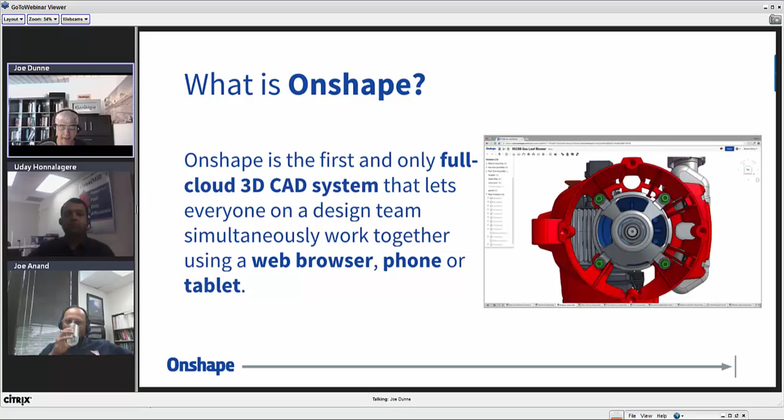It runs on every platform, right? This is why we had to start from scratch. We architected this product in a very different way than any product on the market. And one of the clear indications of that is the fact that you can run it on any hardware platform that you have, and it's really refreshing to be able to do that. And it's very powerful as well. The core of our product is similar to any MCAD, mechanical CAD system. It's parts, assemblies, and drawings, right?

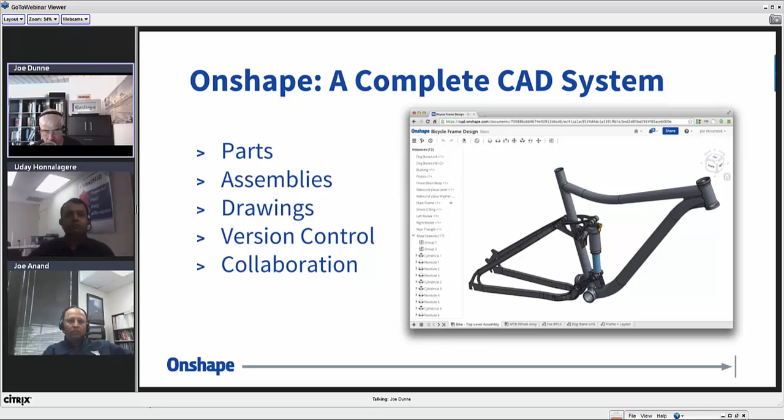It's the same thing that you use in SolidWorks or ProEngineer or CATIA or Inventor or Solid Edge, or I could name at least a handful of professional CAD products, and that's what we're going after. Onshape is parts, assemblies, and drawings. It's a core product for professionals to use, and it also means we work in a very similar way to most of the professional CAD systems out there, because, to be honest, they're all more common than they are different, and that means they're parametric feature-based modelers.

We use some underlying technology such as Parasolid and D-Cubed. Those are some tools that we're using under the hood. That raises the caliber of our product and puts us in the realm of professionals. And the reason why I say it is probably every product that you have on your desk or that you drive or that you use somewhere is using that same technology. It's pretty much the standard out there of all production use in CAD.

Now, what I want to make clear is a lot of people will look at Onshape, and Onshape is a brand new product. We do a lot already. But there's also some things that probably are missing that you might look at. It's possible anyway. Some people have a complete solution, but I get a lot of questions of, will you do sheet metal, or will you be able to do surfacing, or will you be able to handle large assemblies? And actually, we do large assemblies pretty well now.

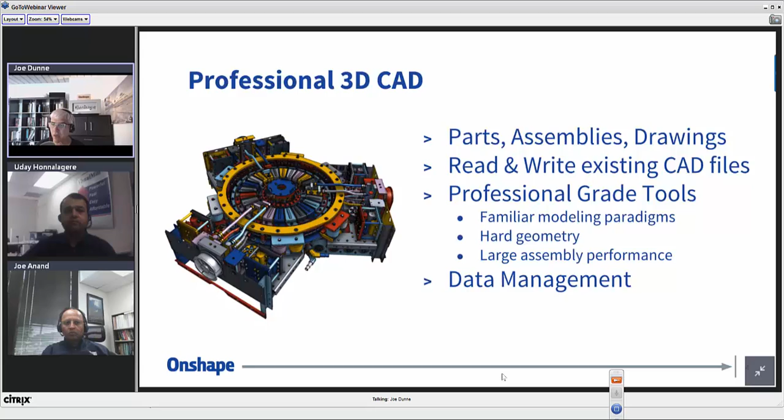But the point is that the answer is yes. If you look at Pro-E or Creo, or if you look at SolidWorks, or if you look at CATIA, if those products can do something today, the answer is that you will be able to do the same thing in Onshape. That's basically a roadmap, because we're going after high-end pro-grade capabilities. It's just a matter of when.

We're on an extremely aggressive path. Every 3 weeks, our product is updated. If you've been using Onshape, you'll notice that it's constantly getting new functionality. This is not a product where you wait a year and then go through some upgrade process. It's always up to date, and it almost literally always has new functionality that we're delivering to you in a very rapid way.

And I mentioned this already, but we do run on everything. So it's Windows, it's Mac. Between the three of us today, we're going to be on Windows and Macintosh, but I could have been on Chrome or even the tablets, everything.

It's kind of the whole circle. It's the old school coming back again for those of us that have been around a while, Joe. It's mainframe terminals in some ways, but terminals are super smart and cool now, because your tablets or your PCs or Macs are really good terminals. That's kind of the way I look at the cloud solutions, if you will.

Now, most of our users today are using Onshape, and if you're using it today, my guess is you're using it like you use SolidWorks, right? You create parts, you create assemblies, you might create some documentation and a drawing, but you're using it like a standard CAD system, and that's fine, and it works great that way.

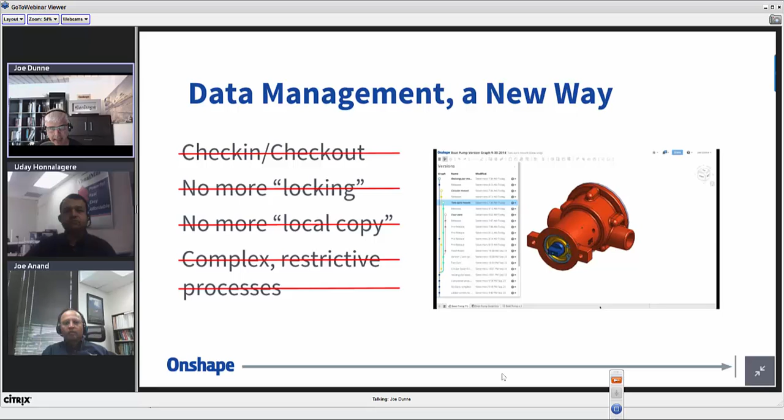So the database and the data management, the difference here, is that you're able to work with multiple people together. The three of us could all be in the same document at the same time, and we don't worry about accidentally overwriting each other's data, or who had the latest copy, or the process of checking out and checking in. All that stuff is just unnecessary. But my point is, that's where you really should look for a very significant difference in Onshape: being able to work with other people.

And if it's not clear about the business model, this was another reason why we really started from scratch. I doubt any of the existing CAD companies selling very expensive products can really do this. We have a free version and a professional version, and there is no difference in CAD functionality when it comes to parts, assemblies and drawings, surfacing, large assembly design. All the capability that we ship for Onshape is available to all users, and you can use the entire product for free. What we differentiate between free and professional is privacy.

And the idea is that if you use Onshape in a public manner, kind of think of it like Facebook or YouTube or something, you can build your models and work with Onshape, but other people could see what you're doing potentially. You don't have any limitations at all. But if you have intellectual property that you do want to protect and save, then you would be a professional user.

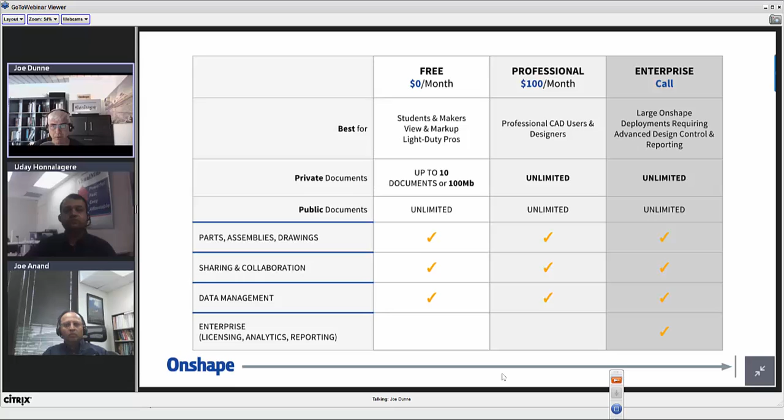And that's the way we've decided to attack this, because it allows the education market, makers, and hobbyists to have a tool they can use. Privacy is not a concern for them, and it's a great access point for them. But professionals probably don't want their intellectual property to be shared. So I really do love this business model, because it's just super easy to understand and to get access to. So that was Onshape.

Well, I want to turn it over. I think, Joe, you're going to do this part of it? Yeah. All right. I'm done. Okay, so yeah, thanks for the introduction there.

We're MecSoft. We actually work very well with the Onshape product. We are very impressed with what Onshape has done, and it's really a revolutionary product from our perspective. That's why we want to be their partners, and we work very closely with them. Uday will later show you how our products work with theirs. But for those of you not familiar with MecSoft, let me give you a very brief introduction before we jump into the actual demo.

What is MecSoft? We are a company that produces Windows desktop CAM software products for manufacturing parts in a wide variety of industries. We've been in business for quite a while. Our tagline is, "We are your CAM partner." What we mean by that is CAM is a little bit different from CAD, where you're actually interfacing with a machine tool. Typically there are a lot of issues with the handshake between the software system and your hardware.

So that's what we mean by being your CAM partner. We don't just sell you a product and go away. We actually stand behind our products, and we are there to support whatever post-processing or hardware issues you might have in interfacing our software with your CNC machine. So if you can go to the next slide, please.

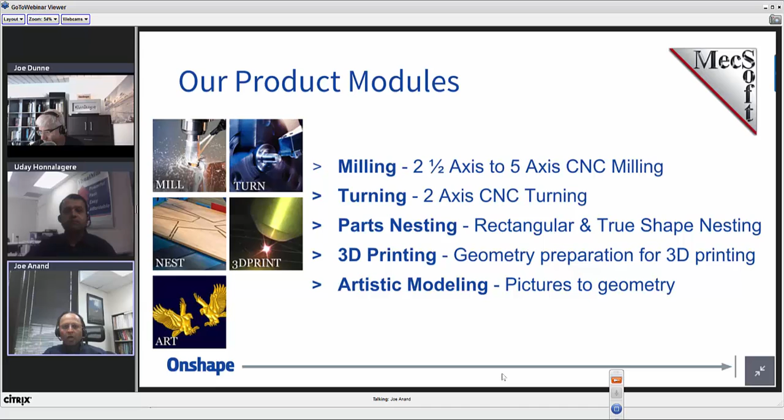And then we also have the 3D printing product I just mentioned, geometry preparation for 3D printing, fixing up bad meshes, holes in meshes, creating supports, and then taking them out to the 3D printer. And we also have an artistic modeling product. This is typically used by woodworkers, and we're doing relief modeling and things like that. So you can take bitmap pictures, BMP, JPEG, and PNG files, and convert them to actual 3D geometry that you can use in our machining product. So that's a little bit about our product modules.

As far as the industries that we target and we are very strong in, this is a list of industries. You can go to our website actually to see a lot of the case studies that we have done with various different customers in these industries. This is really not in the order of importance, it's just something I've thrown together here. Production machining, which basically means that you're machining a lot of maybe a single part. So that means you're optimizing the tool paths. So time is of essence. So you're creating very efficient tool paths, and typically the parts are prismatic parts.

Woodworking is a strong industry for us. Furniture making, both very functional as well as artistic furniture. Mold and die making. We don't play that much in the die industry, that is, if we're looking at the automotive dies. But in the mold industry, the plastic injection mold, we have a strong presence as well. Aerospace, space, and automotive. These are for, again, the smaller parts for aerospace and automotive. Because of our 5-axis offering, we can do aerospace type of parts as well. Thin rib parts and twisted parts and things like that.

And interestingly enough, we also are very strong in music. I mean, this is for musical instrument makers, things like guitars, violins, and ukuleles, name it, and we can actually machine these parts. And a lot of the music instrument makers are going to CNC these days. So, jewelry and artistic machining. Prototyping is big. A lot of prototyping is now being done in 3D printing, but there's a lot of materials that you still need CNC. For instance, if you want to do stone machining or rock or zirconium machining for dental applications, materials you can't really 3D print, that's where the CNC part comes in.

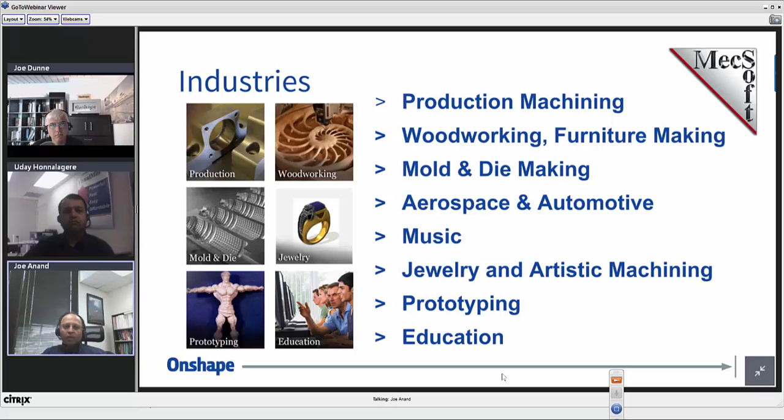All right, Joe, next slide, please. Okay, a little bit about our pricing. As I mentioned, in our milling product, we go from 2-axis all the way up to 5-axis milling. Not everybody needs 5-axis. So what we have done is we configured our product to tailor it to different needs.

And this is really, as I mentioned, for tire kickers who don't know CAM, want to get into CAM, but they don't want to spend any money at that point, but want to learn a little bit of CAM. And then students as well. A lot of students use this product.

And then we have the standard configuration, which retails for $1,500. We're doing a sale right now, actually a month-long sale, which is selling for $999 US dollars. By the way, these prices are only for North America. We do have resellers in other parts of the world, and the pricing might be different. In Europe, for instance, all our resellers sell in euros, because of customs and local taxes, prices are different, so you need to check with the local resellers to get the correct pricing. So the standard product includes full 2.5-axis and 3-axis support.

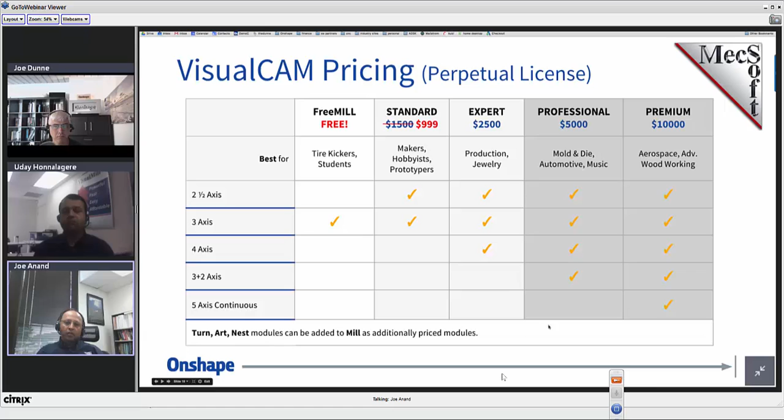And we also have turn, art, nest. These are modules that can be added on top of the mill products that I just talked about. And you can get all the pricing information from our e-store. We just launched an e-store. If you go to our website and click on the eStore button or Buy Now button, you'll be able to see all the pricing. We're pretty transparent about our pricing, so it's all there. So go ahead and take a look.

All right, Joe. And now let's jump on to the demo here. Yeah. Thanks, Joe.

What we thought we'd do is start off with a little bit of Onshape. And Uday and I are both working together. The point I want to make here is not to give you an overview of Onshape. Like I said, there's other places that we can cover this in detail. But for those of you that are using it, there are certainly a couple things I think you should try if you haven't.

And the first is just the fact that this is a great scenario. Let's just say for the sake of argument that this is the part that I as the engineer am working on. I'm building a gearbox. And so I've done the design as the engineer, and now it's time for manufacturing. A very common scenario is where I probably have someone else that's the expert in manufacturing. In this case, it's going to be Uday, but it could be someone else. You have several options, right?

If you're using a typical CAD system, your option is hoping maybe they have the ability to read your CAD system, and then you could zip it up and send them your SLDPRT or whatever it happens to be. Or you can also zip up a STEP file or an IGES file and email it to that person. Problem with that is it's called throwing it over the wall. Exactly.

It's what we all do, right? Or we used to do. And this was probably one of the number one reasons we thought that life could be better. There's a lot better way than doing that.

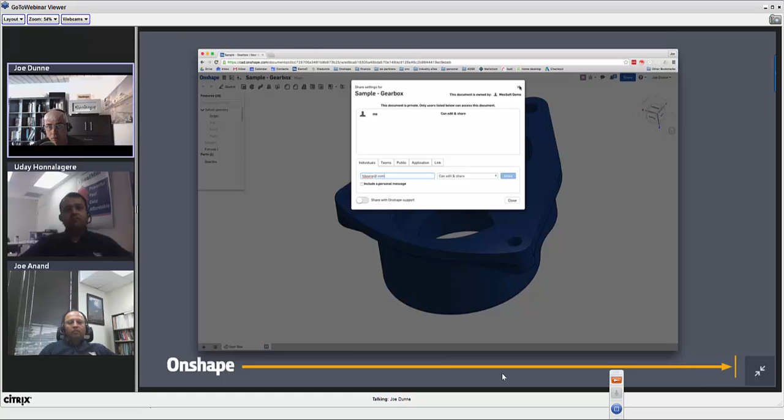And I never worry about, do they have Onshape? Do they have the right computer? Do they have the right version? All that's just taken care of, none of those hassles.

The other thing that's really interesting is that you'll notice there's a big M up there. So Uday, I've shared this model with him, and he's in the model as well. This is the type of thing we can do together because we don't have to create a copy of it. He's working and seeing the exact same thing I am. We're both in one, there's one source of truth. So the entire world can work on this one part.

A couple things we could do: if he makes a change, I see it. If I make a change, he sees it. We don't worry about it. There's a whole versioning tool where we can start putting in versions and create branches, and there's a ton of capability to give us some control over how we work together.

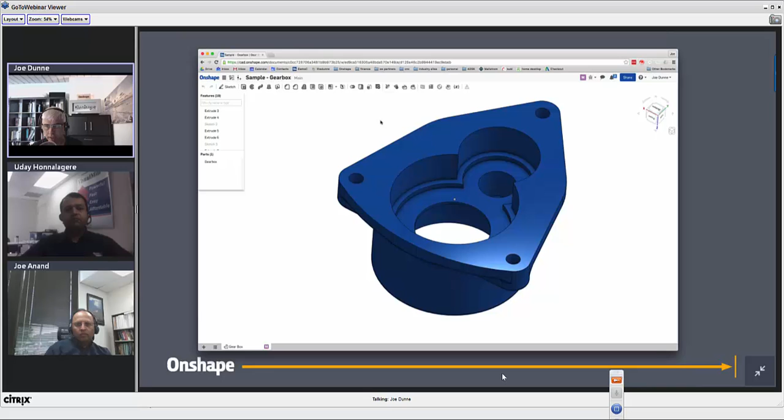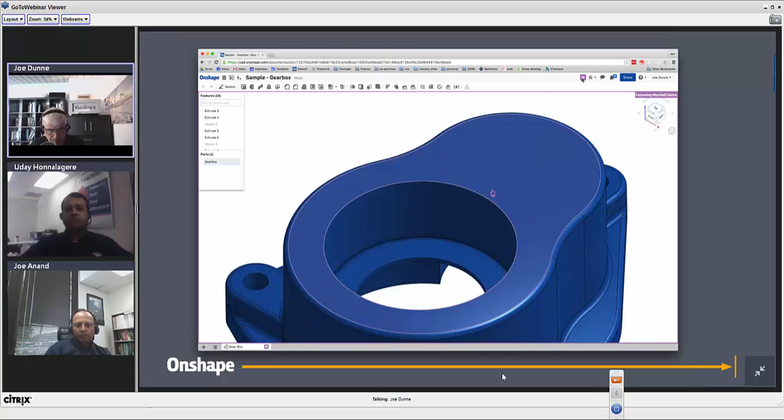However, one of the interesting things—I'm going to do one last thing and then turn it over to Uday—if I click on Uday, Uday, if you want to rotate around, give me some pick up face, zoom in and out, this is just another built-in default functionality of Onshape. I'm not touching the screen now. This is us working together, just in our product, I shared with Uday. I've given him a certain level of access to the model, and we can work together to collaborate on this design.

So it really does simplify the idea of working as a group or working with more than one person. I don't know anyone that does everything all by themselves. There's always something that you need to do to work with someone else in some way. So I think that is what I wanted to show.

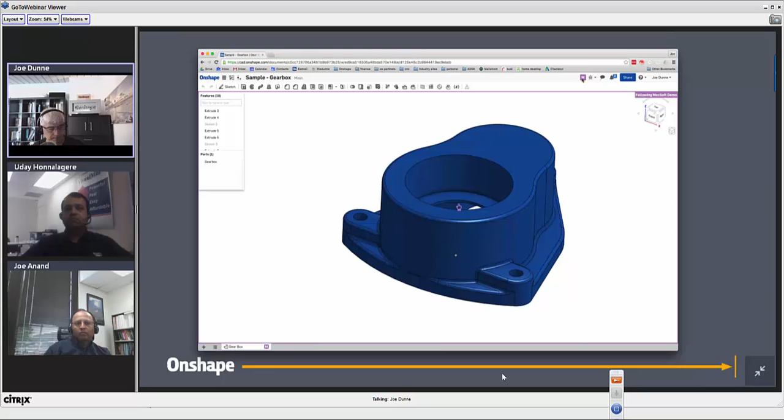Folks, as you can see, Joe and I are both working on the same part in Onshape here, and I have the part and Joe has shared it with me. So now let's take a look at how we can take this model that you've designed in Onshape into Visual CAD-CAM. I go ahead and start up the Visual CAD-CAM application.

Right under the Home tab, I'm going to go up to the Visual Import for Onshape, and select Import from Onshape. When you click on Import from Onshape, this automatically displays your Onshape Document Manager. Obviously you've got to sign in for the first time to connect your documents through the document manager, and then you can look for all of your files in here. So I have several different files, and you can pick the part that you'd like to program. Just select the part and then click the load button.

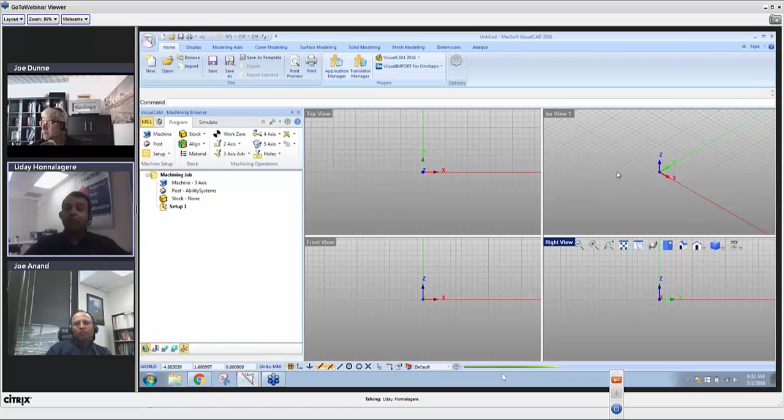This automatically transfers your file into the Visual CAD/CAM desktop application from Onshape, without having to go through any manual file transfer process—your part is already in here, and you can work within Visual CAD/CAM now to program your part. We already got the part translated in just a few seconds, as you can see. Now we are ready to program some toolpaths.

So you can go up to the Visual CAM menu and select the module you'd like to use for programming. In this particular case, this part is ideal for our milling process. I have the mill module selected, and you'll notice the milling interface appears on the left panel, automatically docked. You have the machining operations browser, which gives you access to your program and the simulate tab. And the machining objects browser, which typically appears right below, gives you access to defining your tools, machining regions, features for detecting hole features, and also knowledge bases.

Now the typical workflow in here is to work your way from left to right as you work through each of these groups under the program tab. So the first step, you want to determine if this part is going to be programmed on a 3, 4, or 5 axis CNC mill, and the type of process you're going to be applying for it.

So we'll go up to the machine setup under the program tab and select the type of machining process. For this particular application, I'm going to pick 3 axis. 4 and 5 axis options are also available. So if you have a 5 axis machine and you'd like to machine parts from different orientations, you can do that. In the next step, you would want to select the post processor.

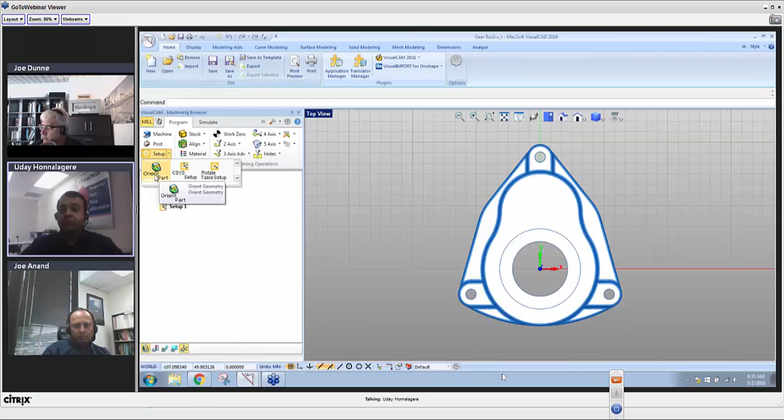And then you're ready to define your stock geometry before you start creating some toolpaths. You can go up to stock, and there's a wide range of different options for defining stock. I'm going to go with the box stock in here, and this automatically determines the minimum stock extents required based on the geometry you imported.

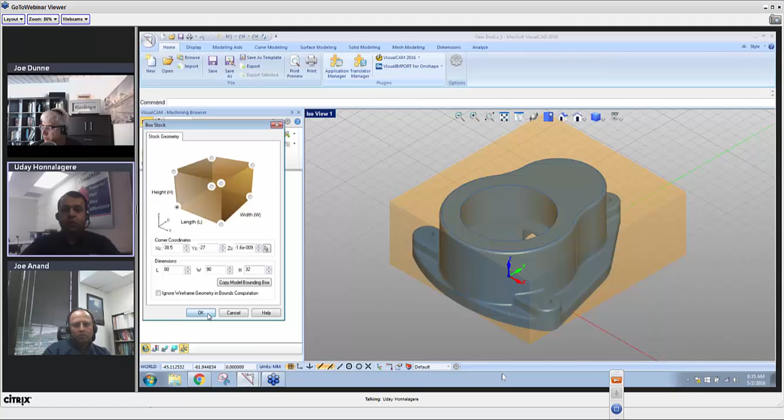So I'm going to round off these numbers. I'll use 80 millimeters by 90 millimeters for the length and the width, and the height I'm going to change this to 32 millimeters. Now once the stock is defined, you can preview the stock right on top of your model.

The next step is to go ahead and align it, and we'll have the stock aligned, and we'll flush it to the bottom in Z, so the bottom of the part is nice and flat. So we're going to flush it to the bottom, and we'll have it centered in X and Y, so you don't leave a factory edge and you clear material from all 4 sides.

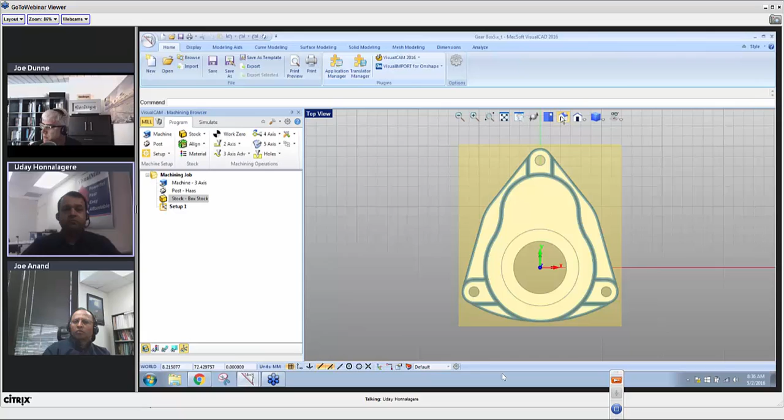Now the next step is to establish your origin. So you can go to set world coordinates. You can set your origin to the stock box, since in this case the stock is larger than the part. And I'm going to put the 0 face to the highest Z, which is the top face of the stock blank. And for the 0 position, I'm going to pick southwest.

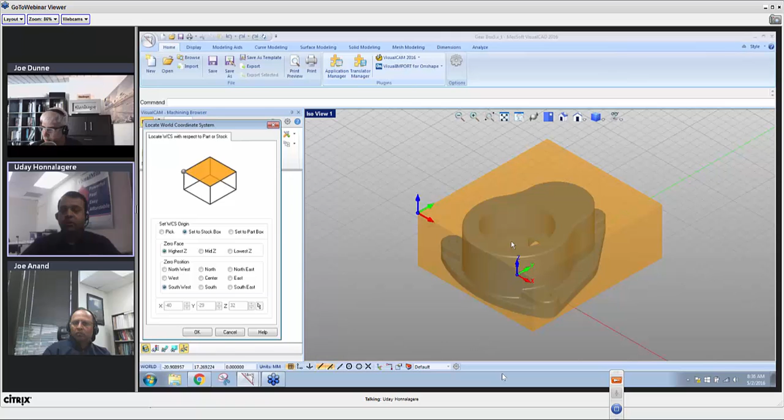Now if you'd like to pick the center of a hole, or you can snap to any point, you can use these controls in here to do that. Now as you notice here, the workflow we are working through is going from left to right as we work through each of these groups.

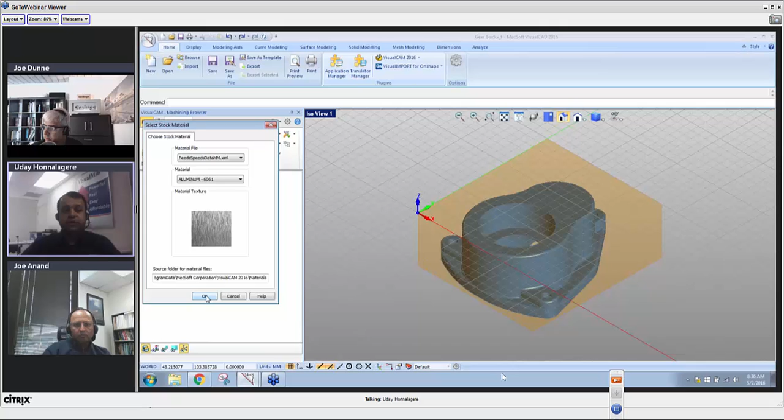The next step is to set your material type, depending on the material you're going to be using for milling this part. So I could pick aluminum 6061, or whatever material you prefer to use. And then you can also display the texture of the material in here. And when you go to your Simulate tab, you can see the texture of the material is being applied to it.

In the next step, you're now ready to program some toolpaths. As Joe pointed out earlier, Visual CAD/CAM offers you a wide range of toolpath methods.

Under 2 axes, we have several methods starting with roughing, facing, pocketing, high-speed pocketing, profiling, V-carve roughing, engraving, chamfering, hole pocketing, thread milling, and remachining.

The 3-axis offers you an even larger set of methods starting with roughing, re-roughing, clear flat machining, pre-finishing and finishing methods, remachining, and pencil tracing, curve-based machining methods.

And of course, we do have 4-axis methods for both indexed and continuous 4-axis and simultaneous 5-axis methods. You also have hole machining methods for 3-axis and 4-axis as well.

Now for this particular part, I would like to start with first roughing it out. So I'm going to go up to 3-axis and use roughing in levels, called horizontal roughing. Since this part has sculpted features on it, I'm going to use 3-axis roughing, and I'll skip the process of selecting any containment areas, so the system will automatically determine the areas that need to be roughed based on the stock and the part geometry.

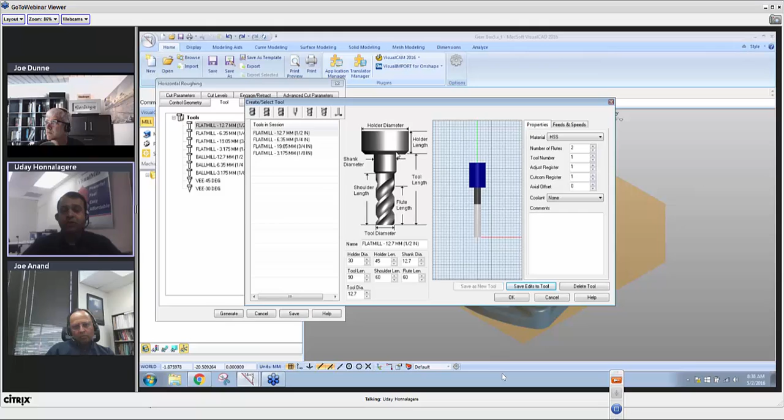We'll select a tool in here. If you'd like to make edits to your tool, just double click on it and you can establish the properties of your tool, specify the material and the feeds and speeds. There's also a built-in feeds and speeds calculator based on the stock and tool material type, and Visual CAM can give you recommendations. Once established, you go into the feeds and speeds tab and you'll notice they're automatically loaded from the tool.

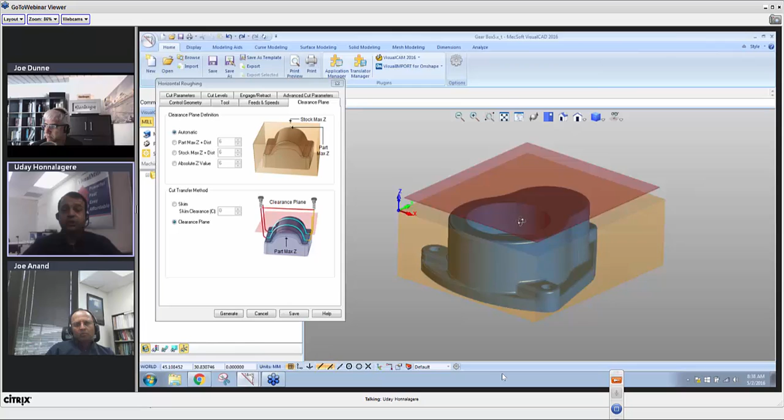The next step is to establish your clearance, your safety plane for transfer motions. When this tab is active, the clearance plane automatically displays on top of the part in your viewport. Then you can establish your cutting parameters: tolerances, stock to leave, cut pattern, cut direction, step overs, cut levels for how fine you'd like the cutter to step, and specify engage and retract.

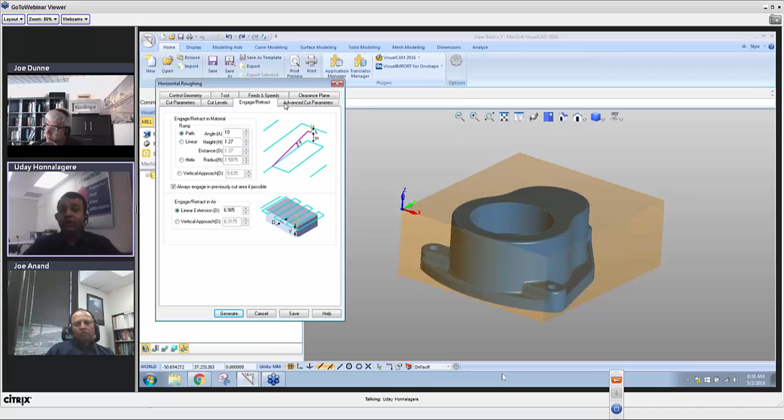Hit the generate button, and the system automatically determines your toolpath based on the part and stock geometry. It computes your roughing toolpath based on the tool selected and the parameters defined, and once computed, the toolpath automatically previews on top of the part in your viewport.

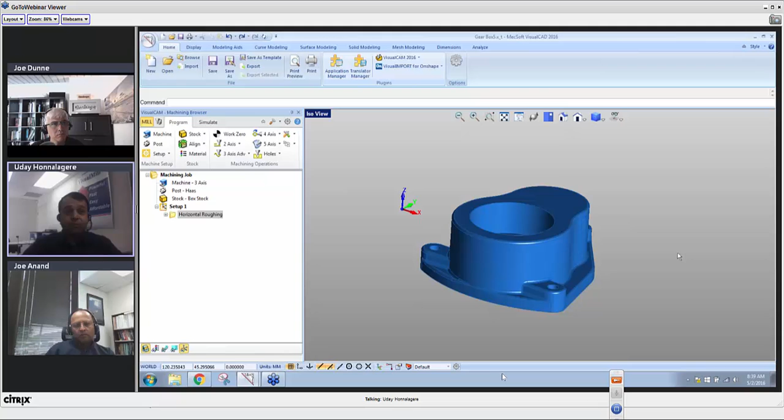What I'm running here is a multi-threading manager. If you have multiple operations, you can generate them simultaneously, each processed on a separate thread. The roughing operation has been generated and automatically appears under your operation tree under setup. You can click on toolpath visibility to preview the toolpath right there.

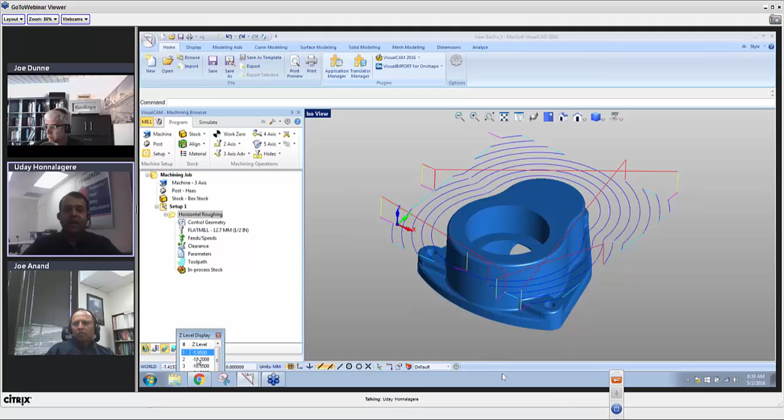You can see those nice arcs on your toolpaths, and you can view the toolpath as you go through each Z level as well. So those are your roughing in levels toolpath.

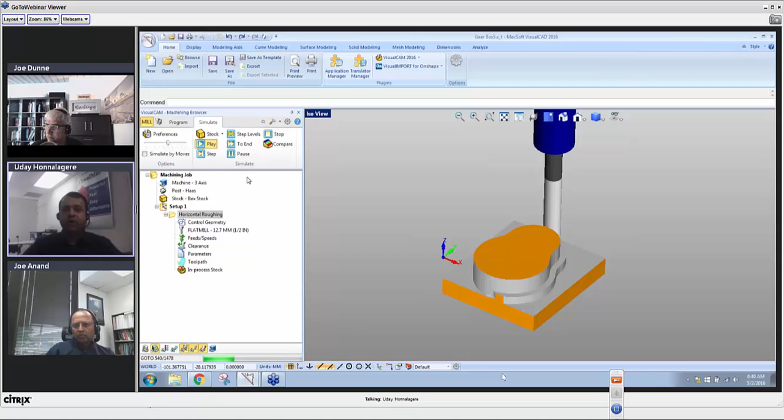Now let's go ahead and run a verification in here, so let's switch to the Simulate tab. You select the operation and hit the play button, and there's your verification right there - your cut material simulation. You can always pause it and then hit simulate to end to run through the simulation.

Once you have it simulated here, in the next step you may want to go back and finish some of those areas. I would like to clear the flat, so you can do a combination of 2 and 3 axis operations.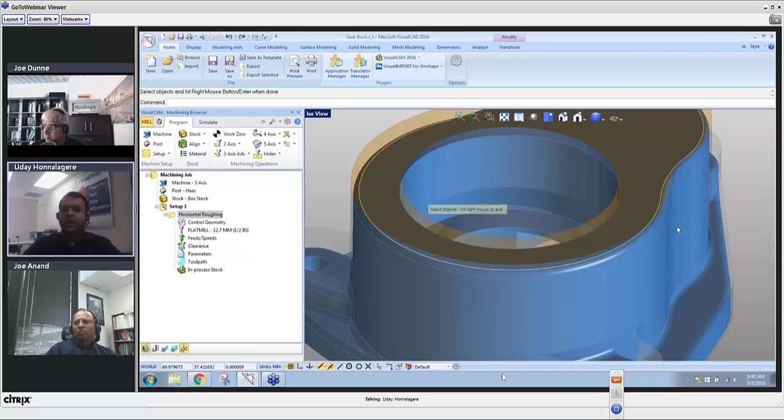Here I'm going to use a facing operation. Select the features - I can directly select the surface edges from the model, as you can notice here. I'm not creating any additional geometries, I'm taking the face edges that were built as part of your design in the Onshape model - those are the face edges. I'll still go with the same tool, the same set of feeds and speeds and parameters, set my parameters for roughing, and then click generate. There's my 2 1/2 axis facing toolpath to clean up the top face of the model.

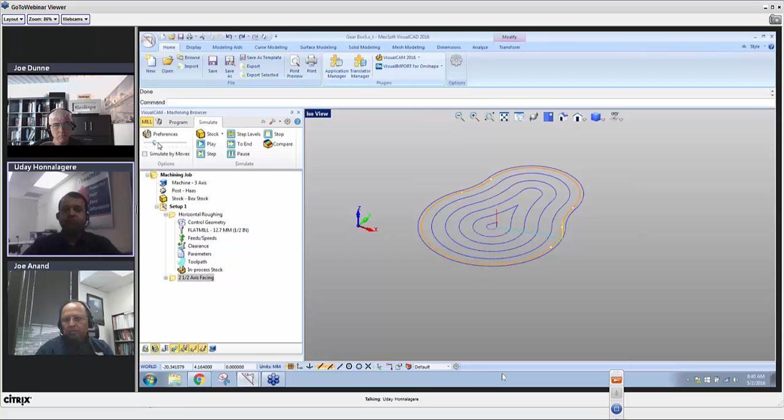And hit play to run the verification. So you can program these toolpaths in here.

Now I want to go back and finish up these holes. I'm going to program a hole profiling operation, 2-axis hole profiling. Select my machining features right here and grab a tool for it. We'll still go with the same tool, specify all the cutting parameters.

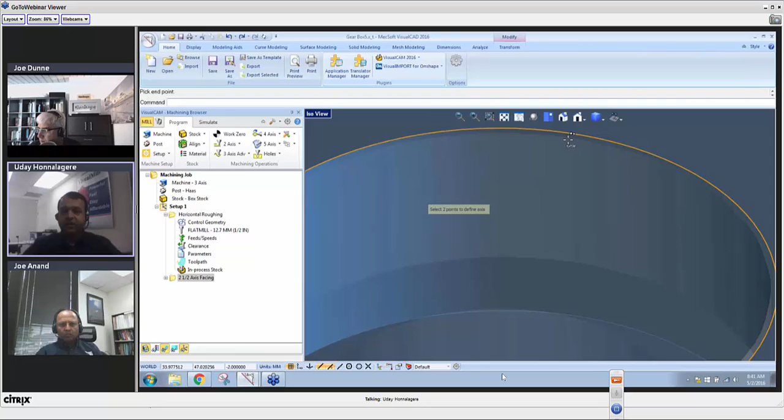I'm going to pick the depth of the 3D model here by snapping to the top edge, and I'll pick the edge near the floor of the part, and there's my total depth. I can specify all of the additional parameters in here. You can also choose your entry and exit and then pick generate.

And there's your hole profiling operation. Go to simulate to run your verification right there.

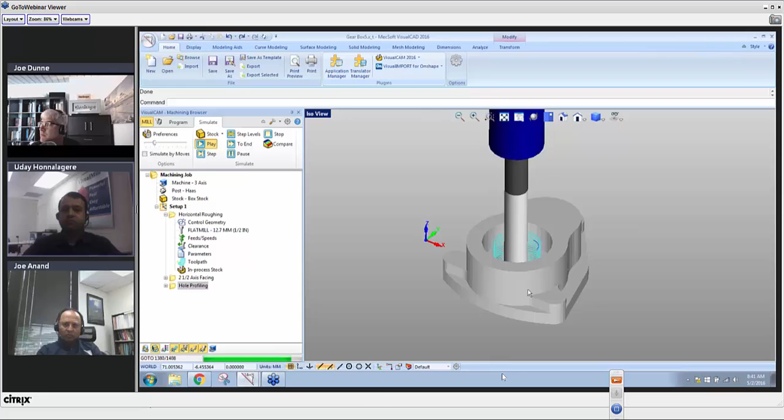Now I would like to go back and clean up the flats in these areas in here, so we can use one of the advanced 3-axis methods called clear flat tops machining, where you can basically select just to mill certain areas in the model. I'm going to use a containment in the Z. I can pick where I want to contain it, as you can see right there. So I only want to cut these flats out, specify all your parameters, and then pick generate.

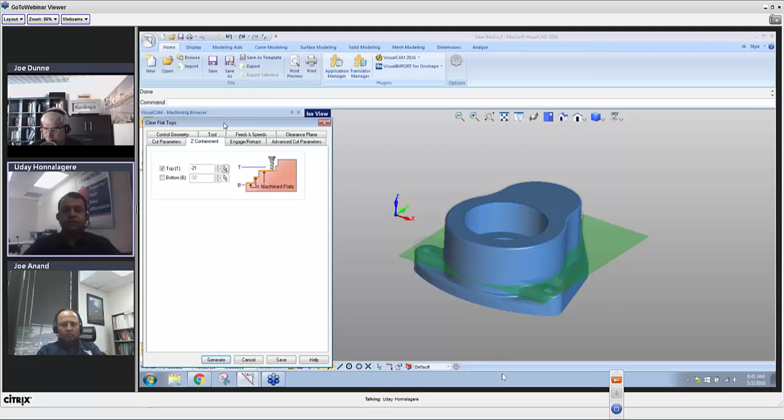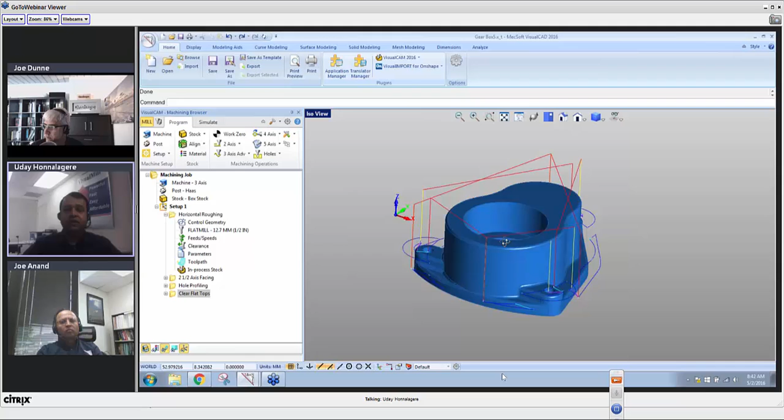In this process, it'll automatically go back and clean up these flats where you have the flats around the filleted edges in the model. So you can program using a combination of both 2 and 3-axis methods in here to efficiently program your part. So you get precise control on each of your toolpaths. There it is.

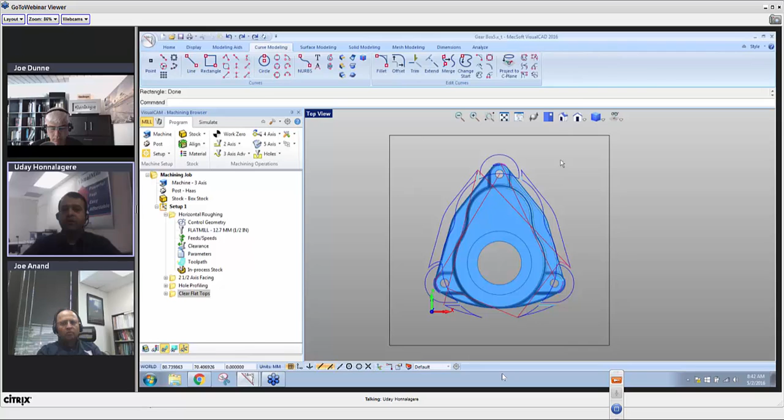Now I would like to go back and finish these exterior shapes and then also do a chamfer on it. Now, since I would like to restrict the toolpath to a specific area, I'm going to use a boundary in here, so you can use some of the drawing tools that are available to you in Visual CAD, and I'm just going to throw in a larger boundary in here. And now I'll go back and program a 3-axis finishing toolpath.

So I'm going to use finishing in levels, which is known as horizontal finishing, and I would like to contain it between these two boundaries in here. So you can use some of these drawing tools to quickly create these boundaries. You can specify a tool for it, specify your cutting parameters, you can control your cut levels, you can also do an optimized machining, and then pick generate.

So in this process, it's going to do a finishing in levels to finish all of the features on the exterior in here using a ball mill or radius tool. So you could be programming multiple operations at the same time. So while the horizontal finishing is being programmed, I could go back and add a chamfer operation in here to select my features for chamfering.

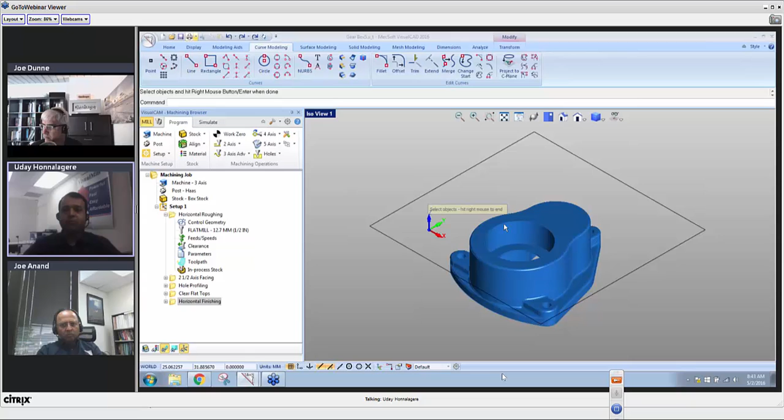So I'm going to pick this edge right over in here and pick the geometry for chamfering. I'm going to grab this edge and go grab a tool for it. We'll pick a 45-degree chamfer, specify the parameters for cutting, and I'm going to choose to determine the side to cut based off the 3D model. So it knows that the chamfer needs to go on the inside and not cut the outside. You can specify your parameters for entry and exit and then pick generate.

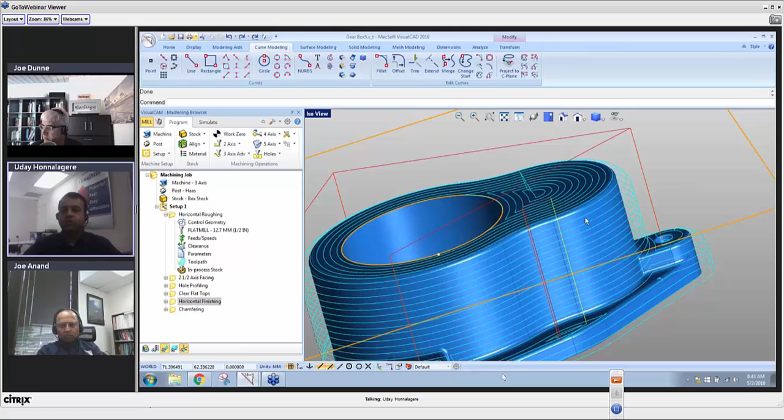And there's your chamfer toolpath. We just got done with the horizontal finishing also. Look at the nice toolpath right there. Finishing in levels with an optimized machining. And we got the chamfer in here on the inside. So let's go ahead and run a verification for those. And hit the simulate button, and there it is.

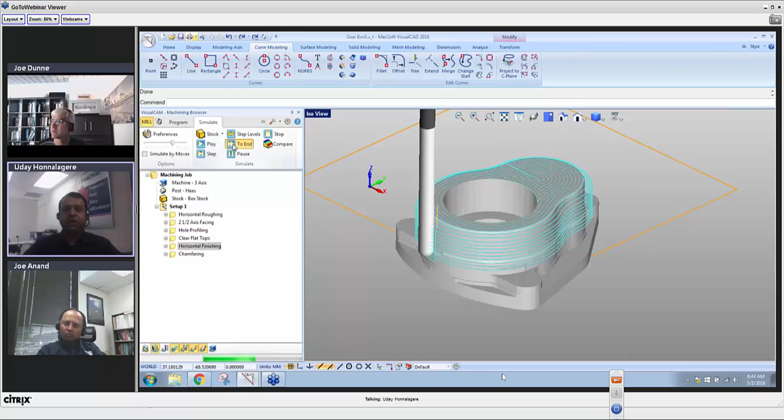It's finishing it up. If you'd like to speed up the simulation, you can use the controls right in here to have it go faster or slower. You can also pause it and then pick simulate to end to run through the simulation. And there's your chamfer. So you don't necessarily have to have the chamfer model on the part. If you just want to break the edge, you can create a chamfer toolpath.

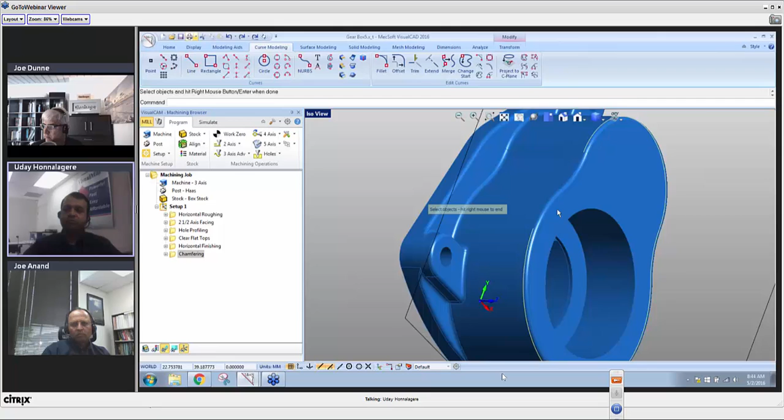Now finally, I would like to mill this fillet using a fillet mill tool. So I'm going to use a 2 1/2 axis profiling operation in here. And I'll go ahead and grab the same set of edges. I'm going to just grab the edge right here at the fillet, at the base edge of the fillet. And you can basically select multiple face edges.

Now once you have this selected in here, I'm going to go to my tool selector, and I have a fillet mill in here. The fillet radius is 1 millimeter, so I have a corner radius of 1 millimeter set for the fillet tool. I have the tool selected, specify the cutting parameters, and again I'm going to use determine using 3D model, so it automatically knows which side to profile the fillet, and then you can specify your entry and exit parameters and then pick generate. And there's your filleting toolpath right there.

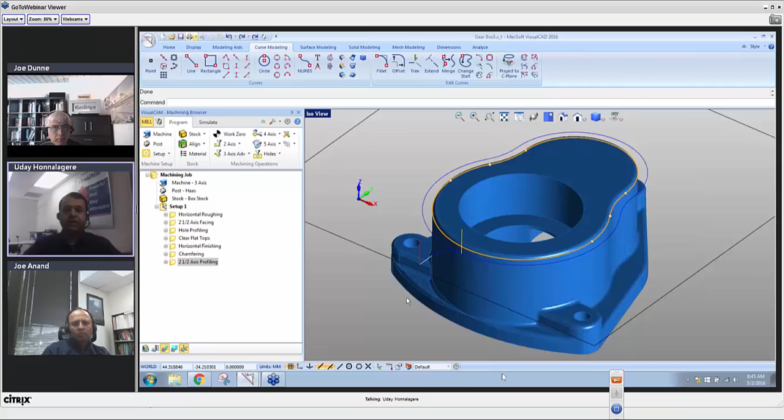If you'd like to make any changes or edits to the parameters, you can always go back and edit it and make changes in here to your entry and exit parameters, and then regenerate the toolpath. And there it is. So let's go ahead and run a verification. Hit the play button. There it is. Your part is now... Slow it down. Can you slow it down? I want to see the fillet. Sure, I can do that.

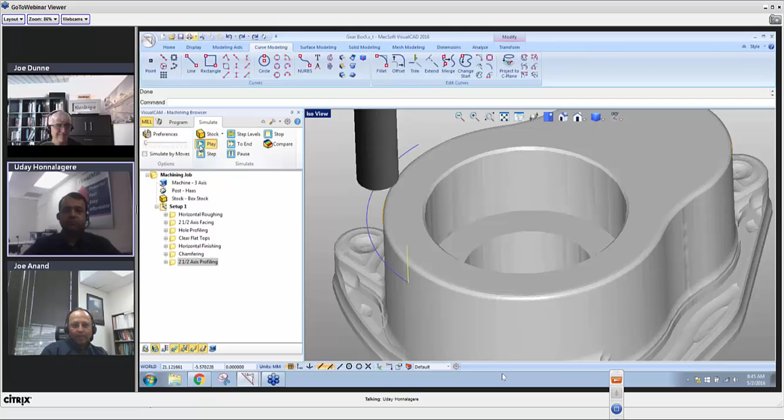There it is. Was it better, Joe? Yeah. Okay.

So once you got all your toolpaths programmed in here, you could go back and take a look at your estimated machining time. It gives you all the information for each operation and then subtotal right there. And you can also generate a very nice setup information sheet. This can be done by going to shop documentation. You specify your file name, you pick a template, and then hit save.

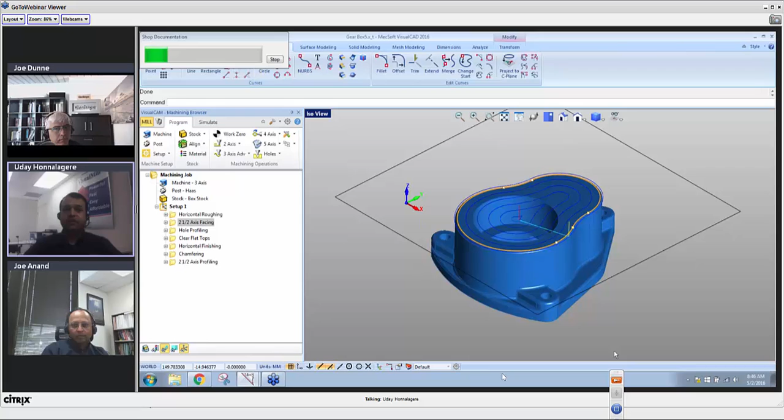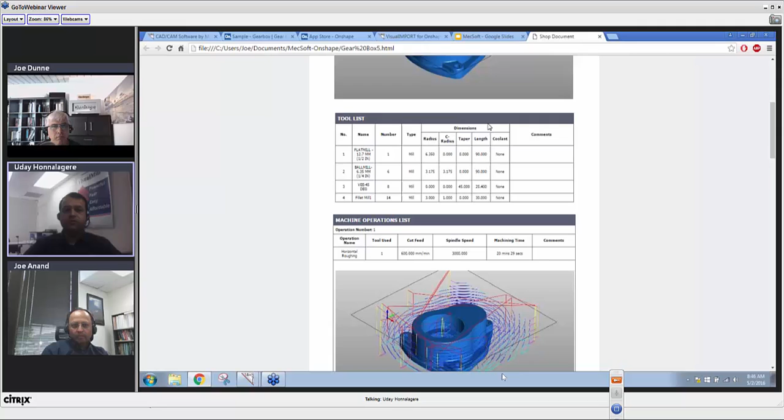So this basically creates a setup information sheet, gives you information about your stock, your tools being used, your operations, and also the parameters. There it is. Gives you total 7 operations using a total of 4 tools, total machining time. So this information could be very handy for the machinist in the shop floor who's looking to get things set up for milling this part.

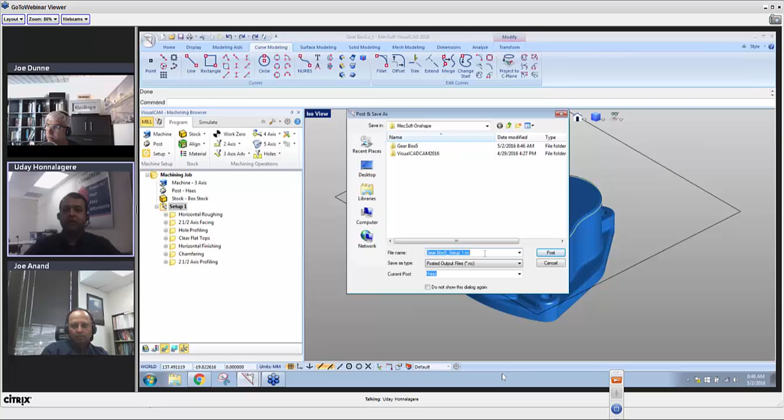And then finally, you'd want to go back and post-process this out to your machine. So right-click on your setup or the machining job and click on Post. Specify your file name and extension right here, and then click on Post. And there's your posted NC file. This is now ready to be transferred out to your CNC machine.

You can see that the tool changes are being called. There's your tool number 1. You can look for the next tool number in here. So there it is. So this basically gives you a workflow of how you can take your parts from Onshape into Visual CAD/CAM to program it.

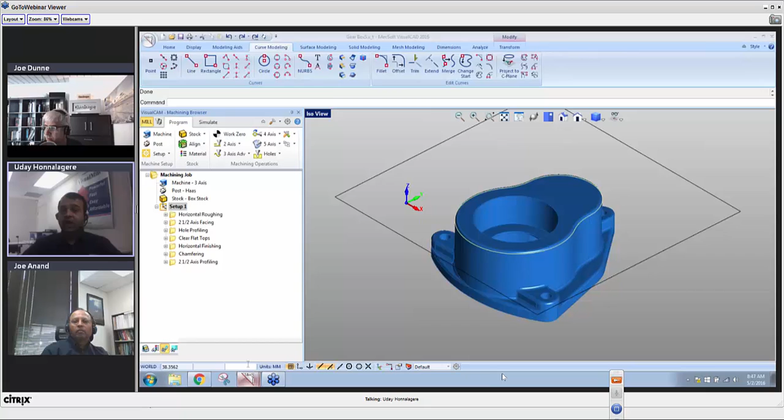Now I do want to bring up one other part here where we have capabilities to program several different types of toolpaths. Here we have multiple setups. The part is being programmed in several different orientations. You have some roughing and finishing toolpaths being programmed from the top orientation, the default orientation. You can go back and program it from different views, different orientations.

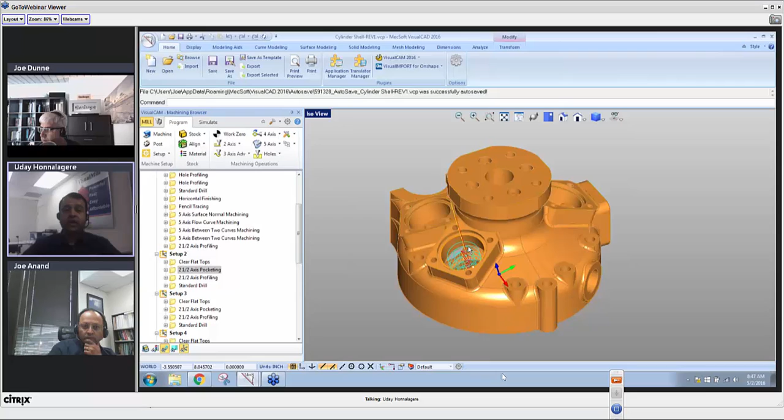So if you have a machine tool, it's a 5-axis machine, and you need to index it and reorient it and program it, you could always program it from different orientations in here. You can always go back and run a verification of it. There it is. And you can, of course, simulate and change the speed of your simulation.

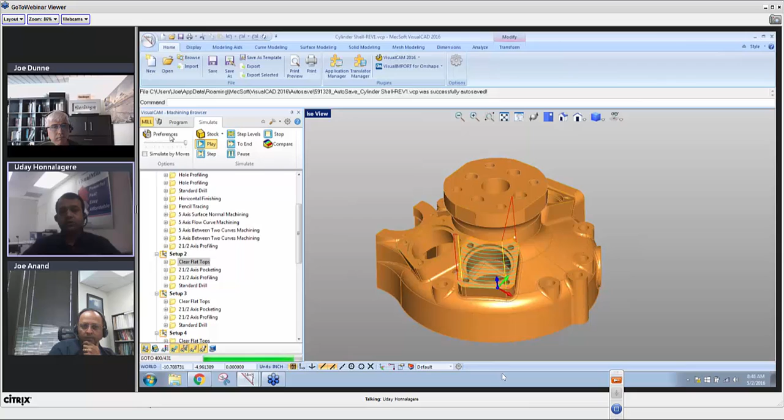Joe, would you like to add anything to it? I think we're good. I think maybe we can pause for questions now. Joe? Yeah, I've been typing. Sorry, guys. I turned off my mic because I didn't want you to hear my keyboard, but I've been trying to answer all the questions. So

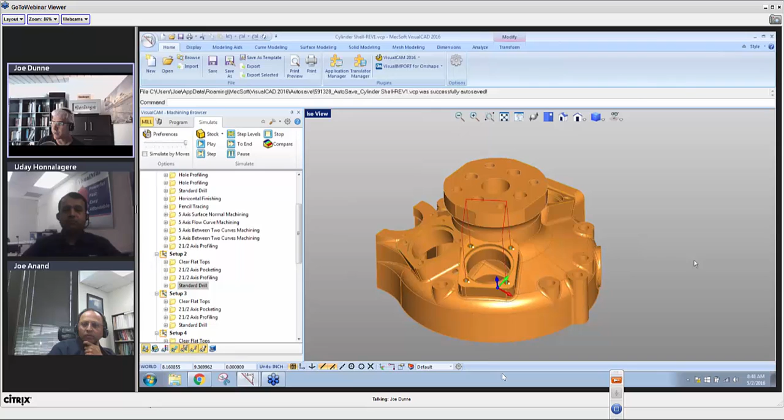Let's see. One question was about storing the information in the Onshape model. So it's really probably a question, no good answer for it. But the question is, does anything get stored in the Onshape model document? The CAM data, the question? Yeah. No. The short answer is no.

Basically, our product is a desktop product. So once you bring in the model, you program the part in the desktop product, and then you can save it as one of our native file formats, and that's where the storage will take place. We do not go back and store anything back in the Onshape model. Not yet anyway. So yeah, not yet automatically. Now, I was going to say, it's all.

I'd recommend doing this, and this is how I use it. You can just add to your document, any document, you can put whatever you want in it. So you could put your report. Actually, the HTML report was very interesting. We should be actually looking at doing that. But you could put your G-code file in the document. You can actually put your Visual CAM file in the document.

So, and that will honor. It's a little manual at this point, but the good thing about doing that is our version graph and the branching and merging also will honor all those. So you can do basically a management with all the data. And we should look at doing a little bit more integration on that as time goes on, Joe. Yes, yeah, we will, definitely.

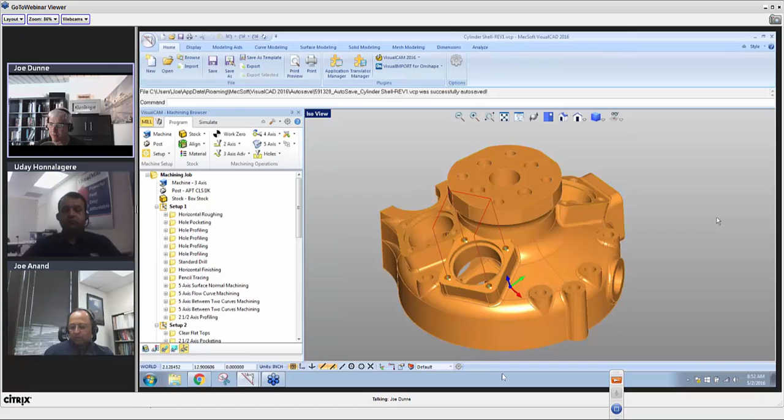Okay. We didn't go to the App Store. I think that might be a good idea to go to the App Store. Uday, do you want to show them how you actually get Visual Cam and start using it with Onshape? Absolutely. So I'm going to go back into the document here in Onshape.

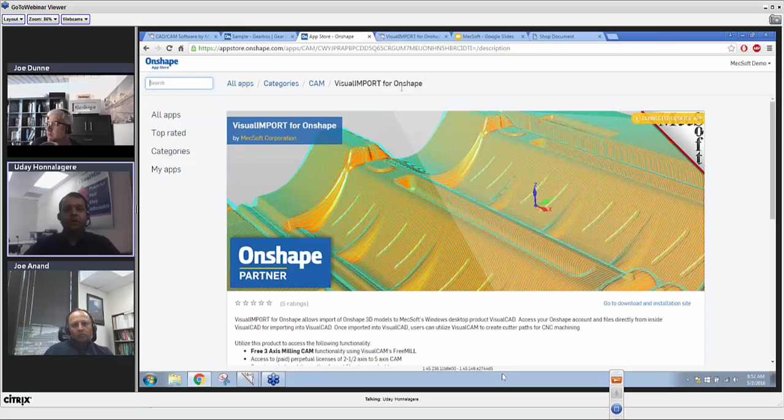So now if you go down to the bottom, you go to the tab right there, you can click on Go to App Store. And then I have the App Store tab right in here. In the search box, just type in MecSoft, and it'll take you directly to Visual Import for Onshape. And you click on Go to Download and Installation Site, and this brings up the MecSoft partner page right there. And here are your three steps.

So once you have Visual CAD CAM installed, you can choose between 64 and 32-bit download. The next step is to download the Visual Import for Onshape. And then when you launch the application, you'll see the Visual Import for Onshape plugin right under the Home tab. Then you can start camming right from Visual CAD CAM. So that's how simple it is.

Yeah, let me walk you through the steps a little bit slowly here. Uday's an expert CAM programmer, so he tends to think everybody's on the same level. But I'm a little bit slow, so I'm going to walk you through this. If you go back to step 1 there, Uday.

So the first thing you want to do is once you get to the App Store and you come to our page, download the Visual CAD CAM installer and install it on your machine if you haven't installed it already. So this is our latest version of the Visual CAD CAM product, the 2016 product, and depending on the desktop machine that you have, you either do the 64-bit or the 32-bit. And obviously ours is a Windows-only desktop product, so you need to have a Windows machine to run this.

So once you have that installed, then you go to step 2. Uday, if you want to click on that, please. Yeah, here you download this Visual Import for Onshape plugin. This is a separate installer, and you would install it, and it'll automatically install the plugin to run inside of the Visual CAD CAM, which you had previously installed.

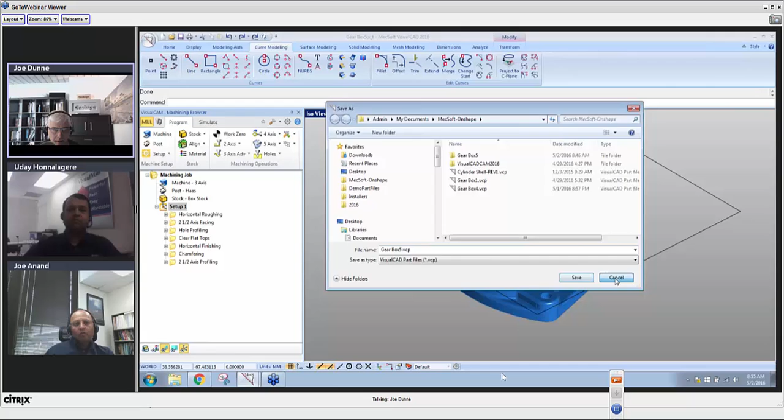I think we're doing part studios only too, right? We're not doing assemblies. Right. So if you have an assembly that you want to machine, it's very simple. You can make a copy and put those into a part studio. Do we do multi-body? That's the other question. We do multi-body now. Yeah. Okay. So you just need to get your geometry into a part studio.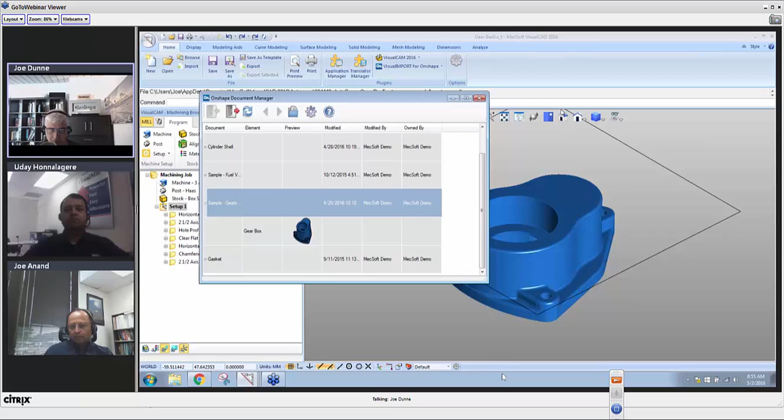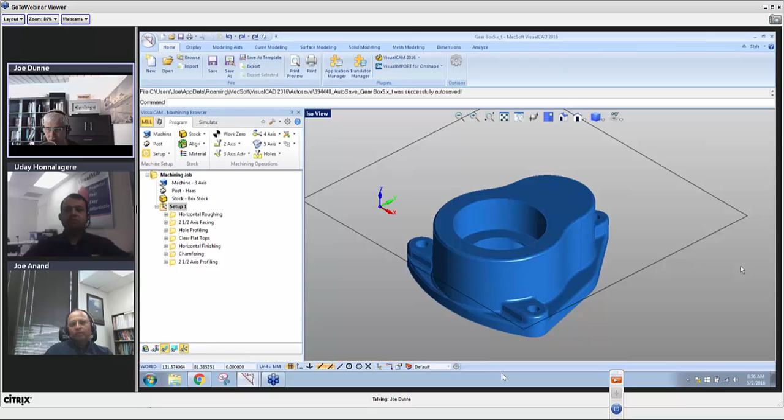There was a question about when both of our products are going to support Hindi. I will say we will be supporting that as soon as the demand is high on that, but it's coming. Just so you know, on Onshape's end of things, on multi-languages, we are rapidly approaching having that capability. We've got a lot of infrastructure. There's a bunch of languages that are already working, and we're going to start rolling that out. I don't know what the dates are, but you're going to start to see multi-languages introduced at a very rapid pace from Onshape.

There's a question on MecSoft on what CAD systems you support. Uday, you want to show the drop down on the different file formats that we can pull in? Sure, I can do that. I hope everybody is still able to see my screen. If you go up to the open dialog, you'll notice that Visual CAD CAM supports a wide range of formats. You can bring in your native Visual CAM and Visual Mill parts from older versions, turn parts,

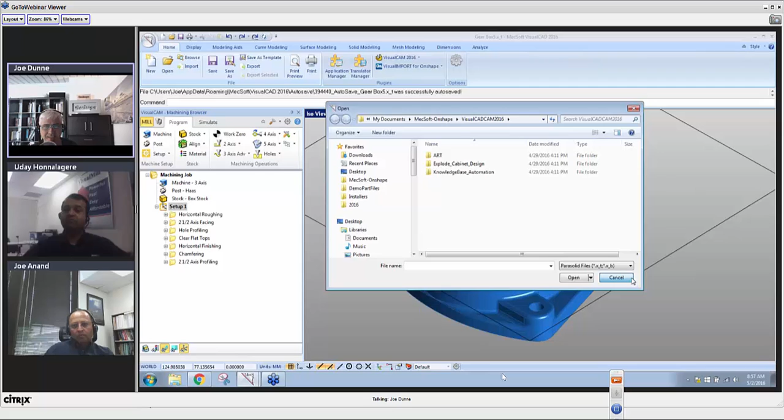3D Studio files, Adobe Illustrator, AMF files, AutoCAD, DXF, DWG, IGES files, Lightwave, OBJ, Parasolids, point cloud files, raw triangle files, native Rhino 3DM files, SAT, SketchUp files, SLC, STEP, STL, U3D, and VRML file formats. And then you add all the formats that Onshape supports, which is a whole handful that aren't included here. Combine these two products and I don't know if we're missing anything. It's pretty much every format I've ever heard of. There's direct mechanical CAD formats from within Onshape too.

So consider that. There's a question on subscription: do you intend to support subscription-based pricing? The short answer is yes. We're looking into it right now, and with the latest release of the 2016 product, we went to software licensing. If you know our products, we used to ship with a hardware key or a dongle. In January of this year, we released 2016 with software licensing, and that has opened up the possibilities for us to do subscription licensing.

We are building the infrastructure right now. At some point, we'll be rolling it out. We're doing it on a limited basis for some of the higher-end products like the Professional or the Premium, where we can manually handle those subscriptions right now. So if you're interested, give us a call, and we can work with you.

There's a question on integrated app, I guess: do you intend to support an integrated app? Joe, I don't know if there is a good answer for that. Yeah, we're definitely looking into that. It's a very natural thing for us to be looking at. Things are evolving in terms of cloud technology, and Onshape is completely cloud-based. Since we are working very closely with them, we are definitely looking at doing something on the cloud.